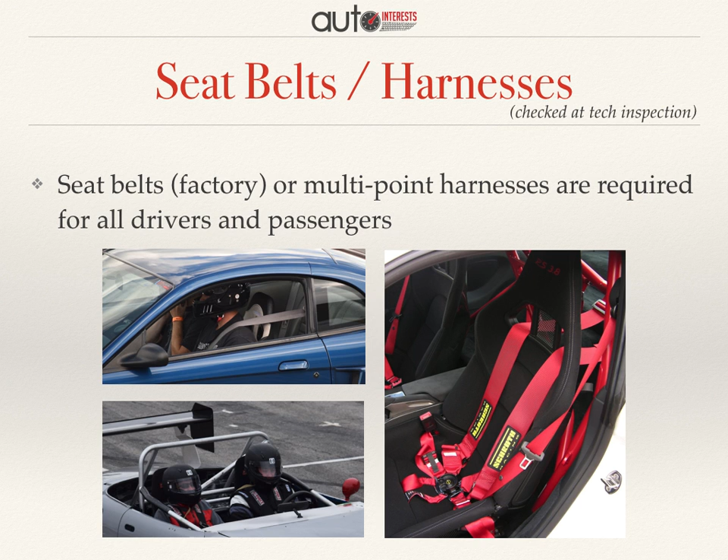Factory seat belts or multi-point harnesses are required for all drivers and passengers.

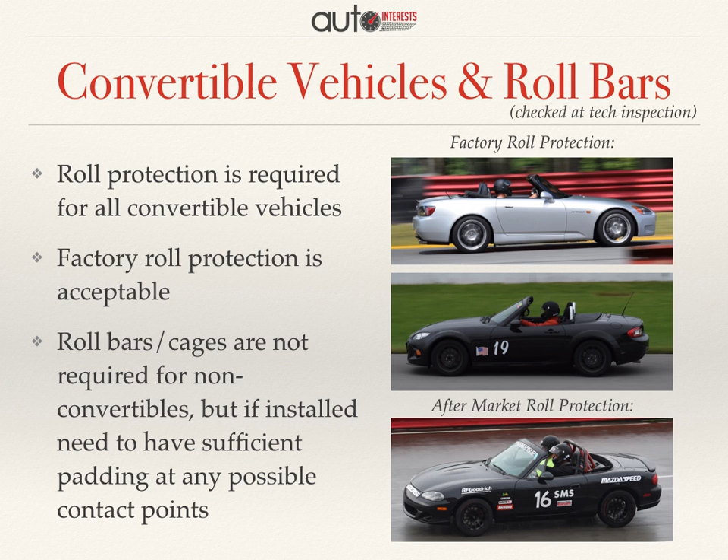Convertible vehicles and roll bars: roll protection is required for all convertible vehicles. Factory roll protection is acceptable. Roll bars or cages are not required for non-convertibles, but if installed, need to have sufficient padding at any possible contact points.

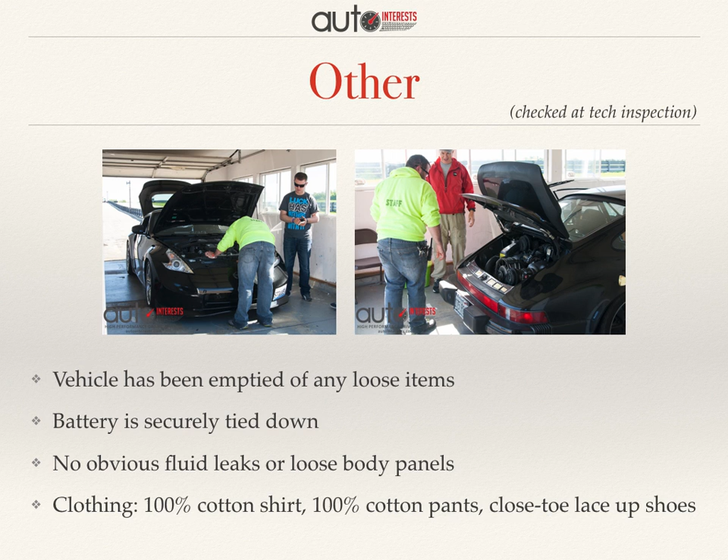Our tech inspectors will also be verifying that the vehicle has been emptied of any loose items, the battery is securely tied down, there are no obvious fluid leaks or loose body panels, and that you have a cotton shirt, long pants, and closed-toed lace-up shoes.

To recap, the AutoInterests tech inspection at each event serves as a spot check of the items we just discussed. However, every participant is solely responsible for adequate vehicle, equipment, and personal protection for a road course event, which leads us to your responsibilities.

You are solely responsible for adequate vehicle, equipment, and personal protection for a road course event. The following information will serve as a general and basic guide for preparing your vehicle for an event. The following list is not definitive or all-inclusive. The following items will not be inspected at an event by our tech inspection. This guide does not constitute any guarantee of safety or any prevention of damage.

You'll want to check these items prior to your event date. We'll break it down into 3 sections: interior and under the hood, exterior and visibility, and mechanical, suspension and steering.

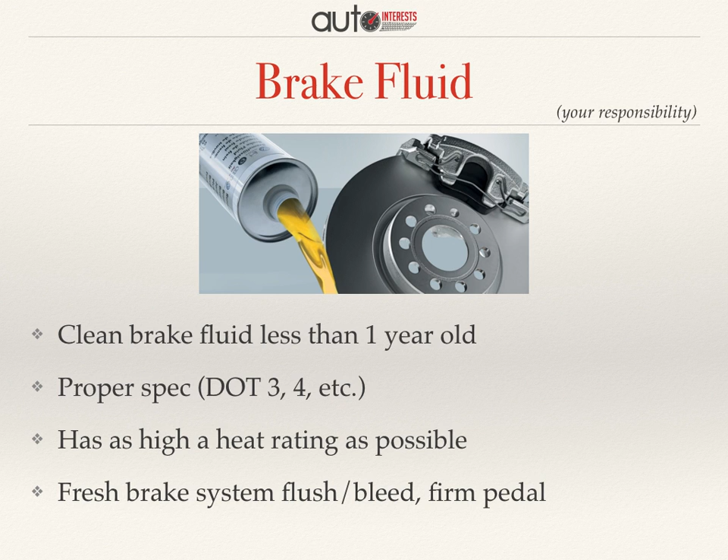First up is interior and under the hood items. Your brake fluid should be clean and less than 1 year old. It should be the proper specification, with as high a heat rating as possible. You should consider a fresh brake system flush and bleed, resulting in a firm pedal.

Your battery needs to be securely mounted with a hold-down bracket. Your fuel lines need to have no leaks and be in good condition. They should be secured, and your fuel filler neck should be secured without leaks.

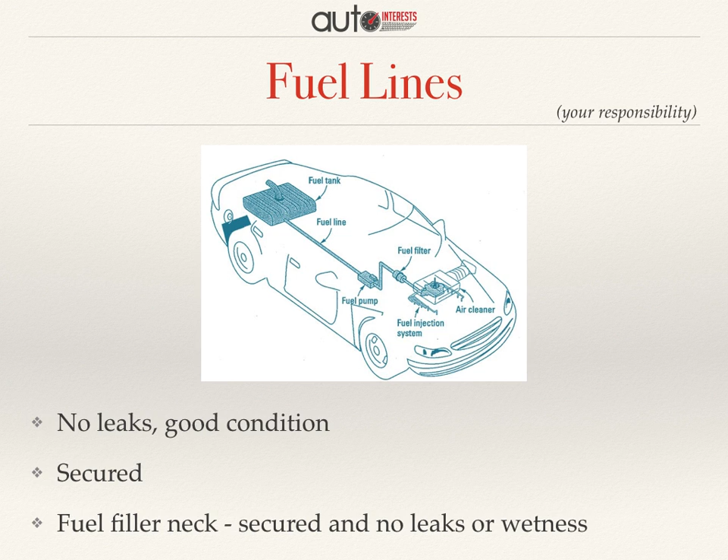Most newer vehicles utilize a drive-by-wire system, but if you have a throttle linkage, it should be smooth, without sticking or play.

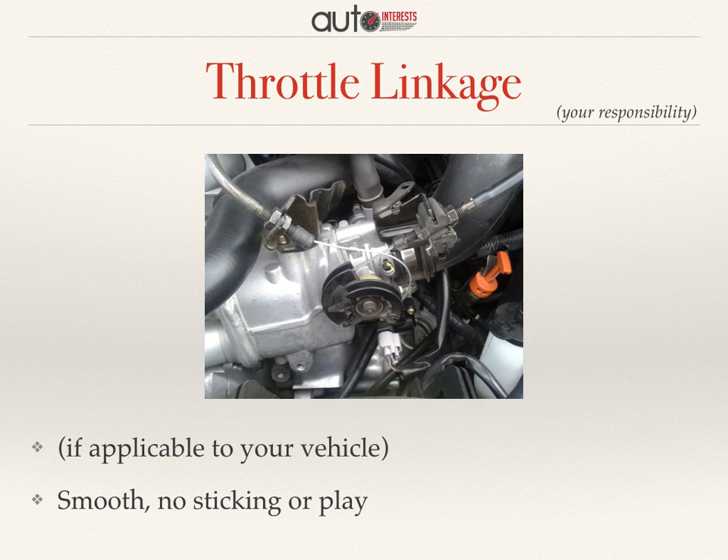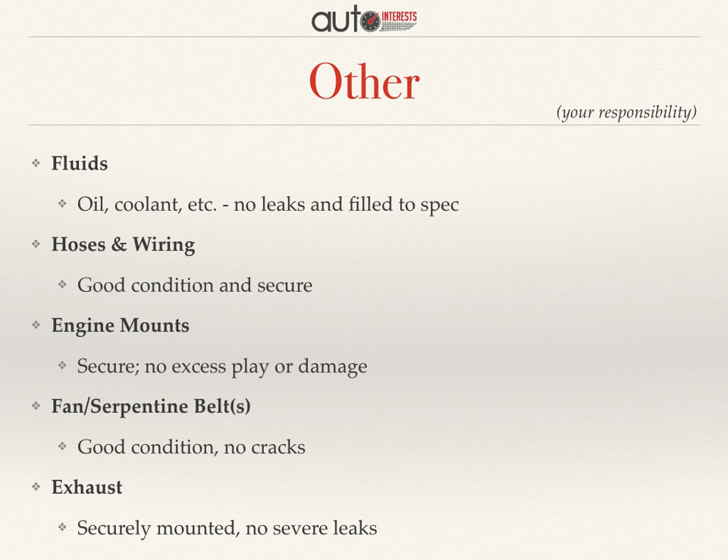Other items that are important for you to check include fluids, such as oil or coolant. There should be no leaks and they should be filled to specification. Hoses and wiring need to be in good condition and secure. Engine mounts need to be secure with no excess play or damage. Fan or serpentine belts should be in good condition without cracks. Your exhaust shall be securely mounted with no severe leaks.

Next, we'll discuss exterior and visibility items. Your windshield should have no severe cracks or scratches inhibiting your vision. Your windshield wipers should be in good working condition, as sometimes it does rain during our events.

Left-hand exterior and rear view mirrors are required. And your brake lights should be in good working condition.

Last up is mechanical, suspension, and steering items. For steering, there should be no excessive play in the wheel or components. Your vehicle should be properly aligned. Your power steering system should have clean fluid, no leaks, and the reservoir should be filled to spec. Tie rod ends should be tight, without damage or play.

Brake calipers should be clear of debris. They should be dry without leaks. Hoses and lines should be secure and in good condition. Brake pads should have a minimum 1/4 inch thickness.

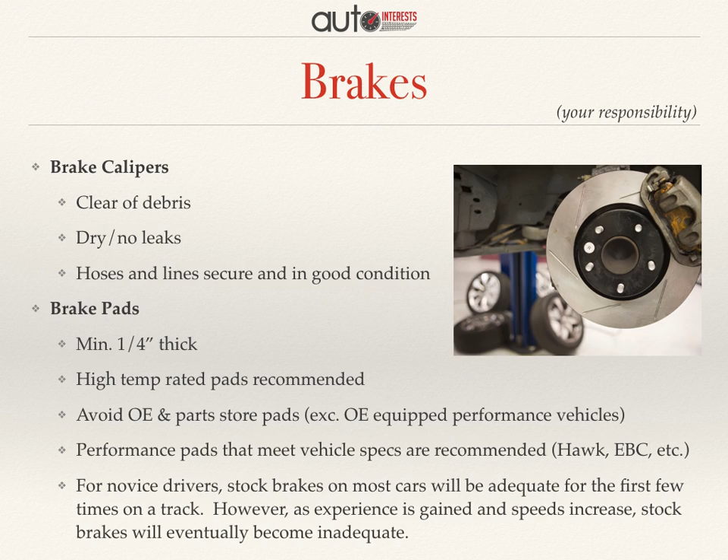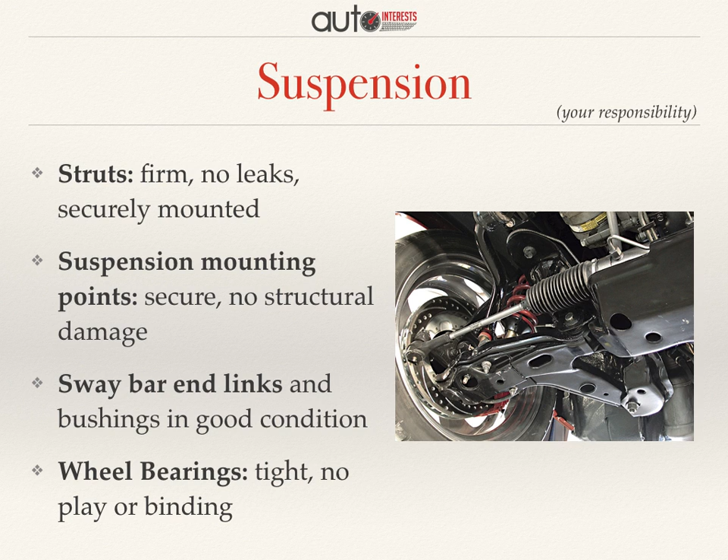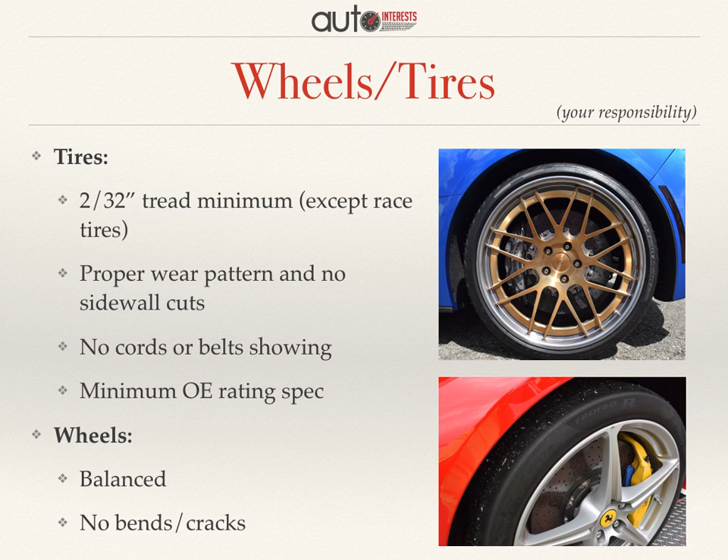Please keep in mind this is a general guide to preparing your vehicle for a road course event. It is highly recommended that you take your vehicle to a qualified and certified mechanic. Under no circumstances should you perform any kind of vehicle or equipment preparation for which you are not qualified.